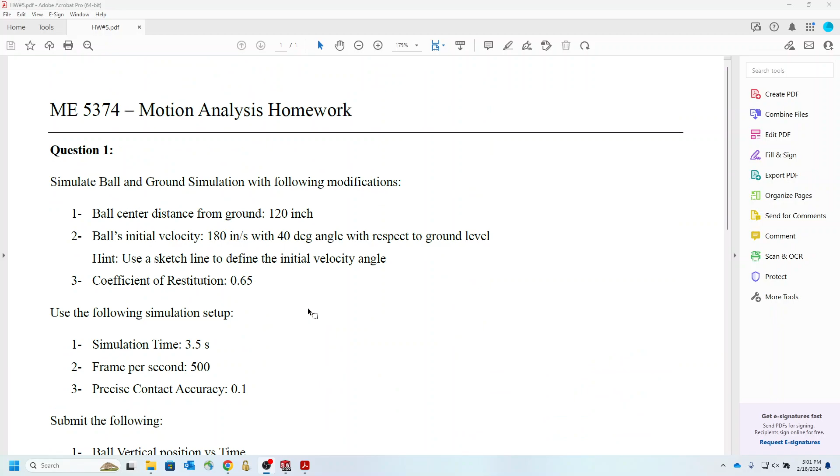Okay, here's the solution to homework number 5 or 6. I can't recall the number. So we had two questions, and I'm going to cover it in two separate videos. Okay, I will start from the ball and ground problem, like a ball and ground setup without any motion study associated with that.

First I have to check the mates in order to make sure that we have all the mates suppressed to give them degrees of freedom. So first of all, the distance before suppressing, we can give it the distance that the problem requested, which is 120 inch. That is going to put the ball at the proper distance from the ground. When the initial distance is okay, we are going to suppress this mate.

So essentially, the ball can freely move in the vertical space. We keep this mate to keep the ball at the center of the ground, and we have to suppress this mate as well to allow the ball to move freely. Okay, the problem asks for ball initial velocity at 180 inch per second with a 40-degree angle with respect to the ground level, and we don't have any geometry here to define that direction.

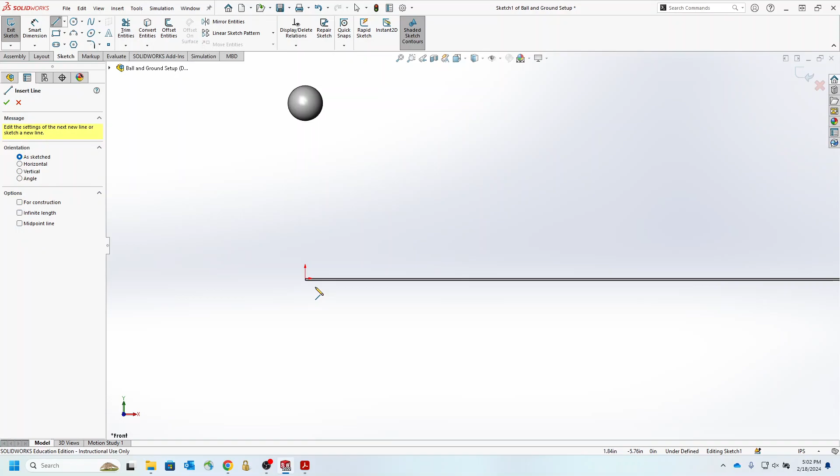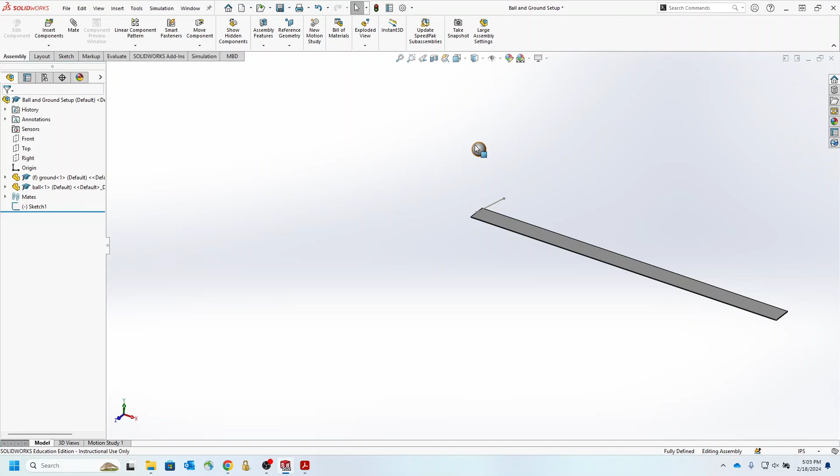So in order to give that the proper dimension, we are going to go back to the model space, and we are going to create a sketch here on the front plane. Front plane is very small, but essentially that's a proper sketch area. And all we have to do is just draw a line here with a 40-degree angle with respect to ground. And that would be the exit sketch. The line should not necessarily be at the ball, it could be at any place, because all the line is going to provide is the direction of the initial velocity.

Going back to motion study, and now we have the additional sketch. So what we are going to do is select the ball and right click on it. It would be adding initial velocity, and here in direction we are going to select this sketch, and then it would be 180. So that would be the direction of that.

Okay, other than that, we are going to have a coefficient of restitution. Since this is a ball here, we have to define a contact between two solid bodies, between the ball and the ground, and when these two selections are complete, we're going to go down. Material, we don't want it, no friction. All we need is coefficient of restitution with a given value of 0.65.

The other simulation setup provided by the problem is, first of all, 3.5 seconds. We will drag it here, zoom in, and also we need to define gravity. So gravity, initial velocity with that angle, and I think that's all we need. Then we're going to go to simulation setup. Number of frames per second is 500, and we are going to use 3.5, which we already did. Precise accuracy at 0.1, and hit OK.

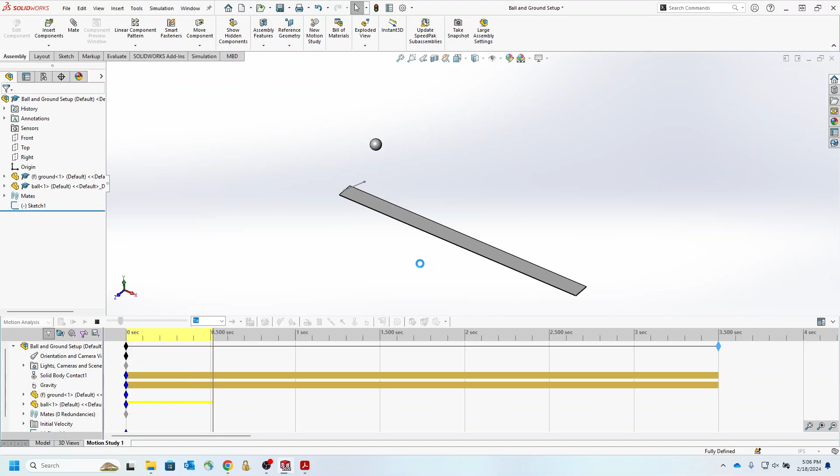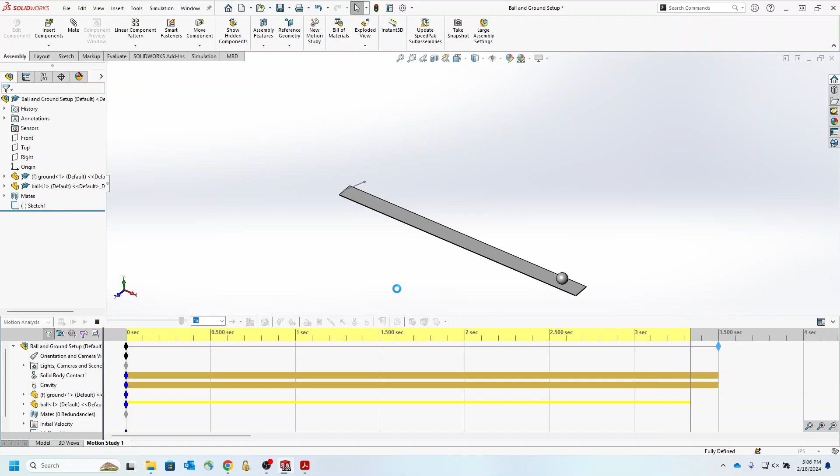We should have everything for setup. It's on motion analysis, so we are going to simulate that. You see it's going to provide that initial velocity. Okay, that was all we needed here. If we play back, we'll see that that's pretty much accurate.

So what the problem asks is to submit the following. Number one, ball vertical position with respect to time. So we are going to go to plot, and this is a displacement. Center of mass position with respect to time. Actually, it was ball vertical position, so it's not center of mass. It would be linear displacement. And it wanted y direction because that's vertical, and the component is the ball. And essentially, that would be what was requested.

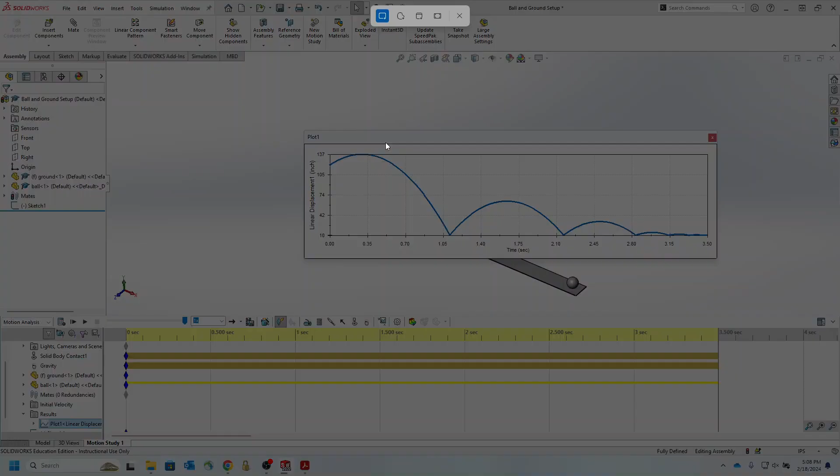I guess I can actually save this result somewhere. I believe it's going to a spreadsheet. Let me see if there's any other option. No, I was hoping that I can get this picture or anything like that, which actually I can make in a screenshot, I believe. Before doing that, I can rename this to ball vertical position. It's going to change the title as well as renaming this one.

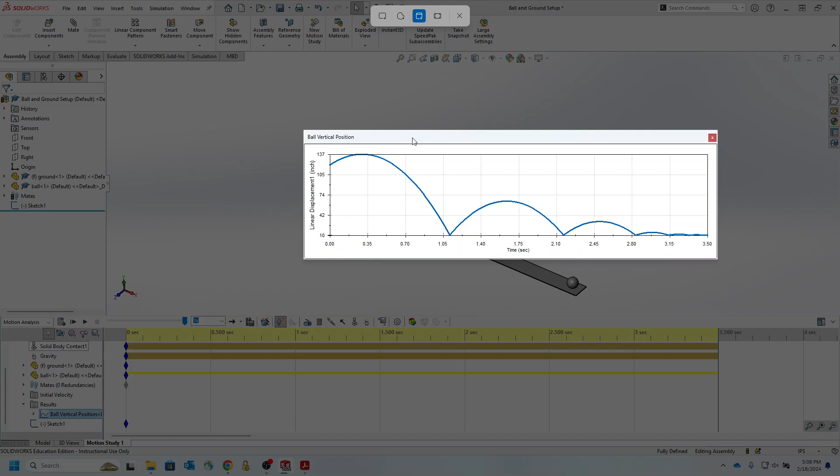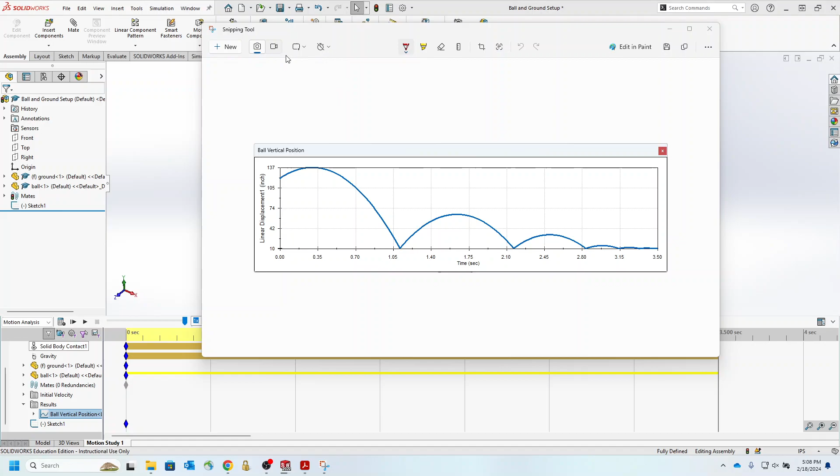Now I can go to the screenshot. I think it's window mode, which would be this. And I have this. I'm going to get this one. I'm going to post it to Canvas. Okay, I'm going to come here, I believe, class 8. So that would be Q1, plot 1.

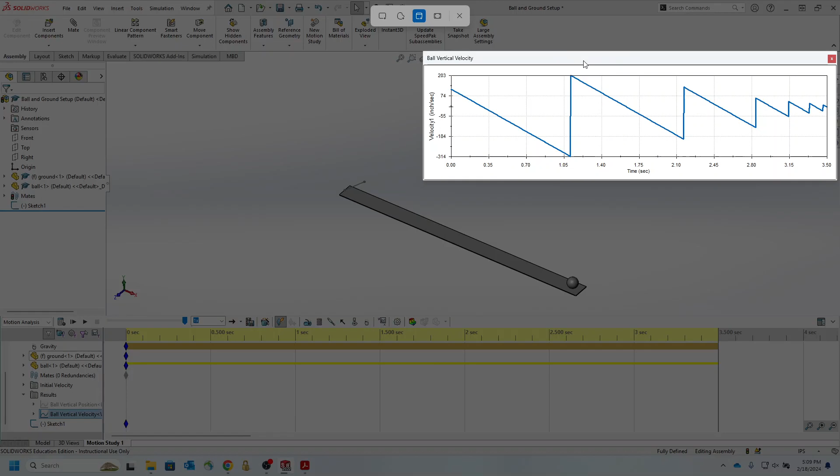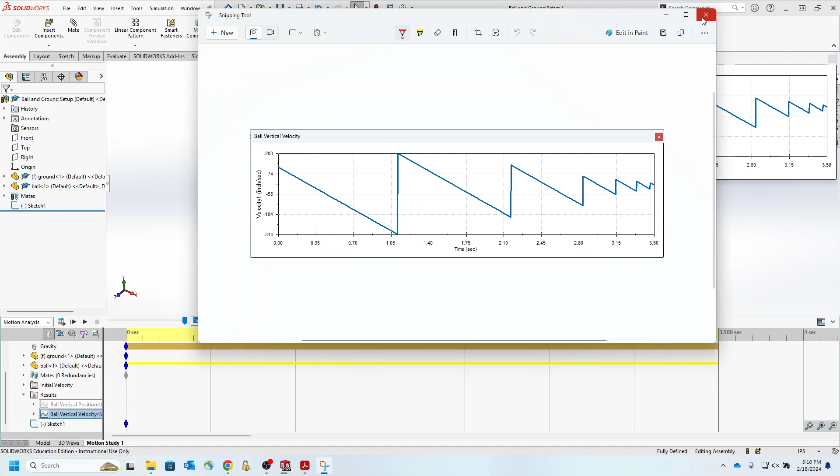Okay, and then the other thing is ball vertical velocity, which would be displacement, linear velocity in the y component of this ball, which is what we wanted. Again, I'm going to rename it ball vertical velocity, and then I'm going to save it again to the same folder, which would be class 8 solutions, and that's plot 2. Okay, and that's all we needed.